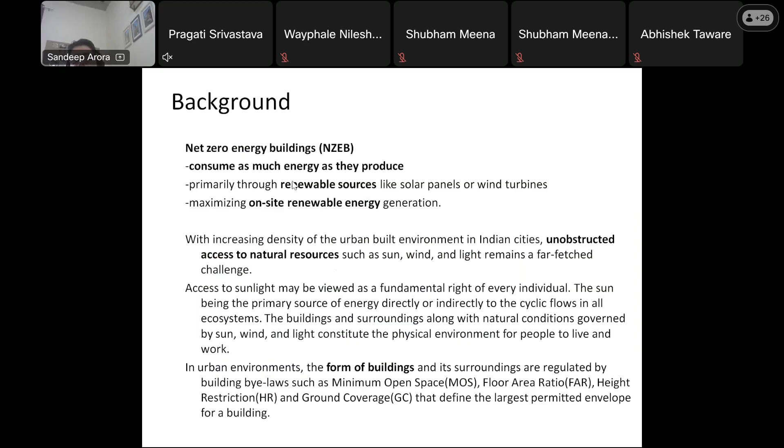One of the news you guys might have heard about, but it's not necessarily news. Everywhere in any city, especially with slum relocation projects, you realize that many of the high density residential areas coming up because of various housing policies and projects have a very different housing scenario, because the primary target is to get to the lower cost, get to the higher density, so that the maximum number of people who are slum dwellers or in a weaker section can be housed.

In an attempt to do that, we end up designing housing or overall building volumes which are too high, too closely packed. In such cases, one cannot expect solar access to light, access to natural wind, morning light and evening light. It's a very difficult scenario. This issue is prevalent irrespective of what city we talk about, and we need to see what we can do about it.

So today I intend to talk about two things. One is climate responsive design, but I don't want to highlight a lot on it because most of the audience are faculty, so they are anyway aware of it. For years we have been studying climate data, analyzing it, deciding on certain strategies. Depending on local conditions, we prioritize certain strategies over another, and come up with strategies of material, finishes, certain kinds of volumes, infiltration or fenestration through the building, and a number of other strategies. But we are very much familiar with that.

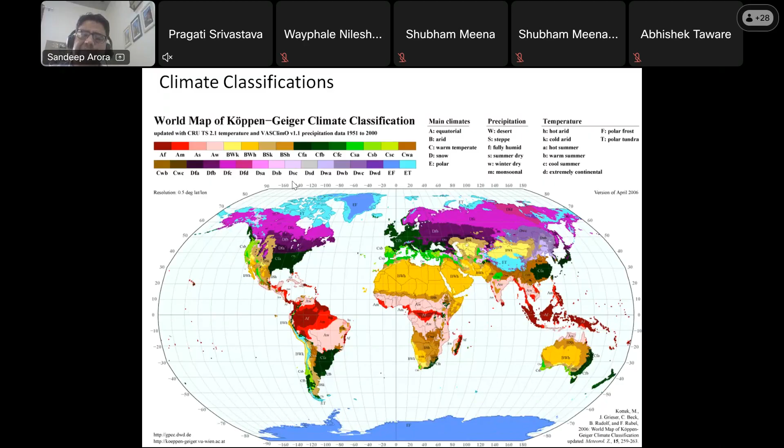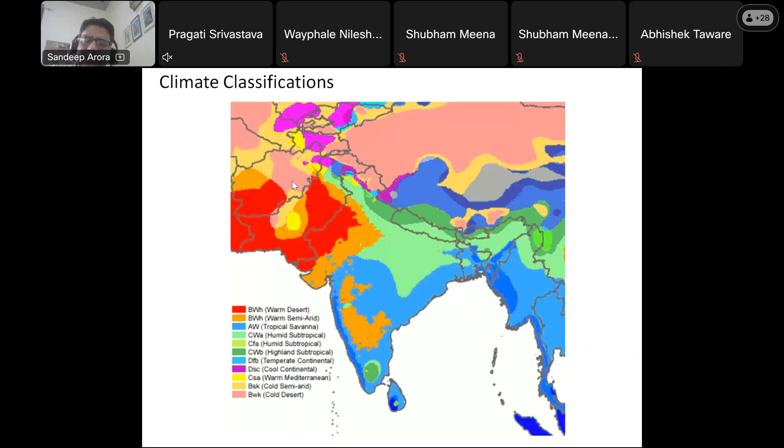But these days, with software and other tools, we don't worry that much about it. This becomes a dialogue only that, okay, this is the climate type, but all kinds of data are available to us. There are so many file types. ISHRAE provides us data of various cities in India, so we can import data from that, insert it into any software, and the software will take care of it.

It will do the calculations for 365 times 24, the annual hours, total number of hours, and identify what kind of characteristics we have for that particular hour - in terms of temperature and humidity. Based on that, it can give us a good plot of what kind of weather we have. This is a very simple tool, and I assume we are all aware of it already.

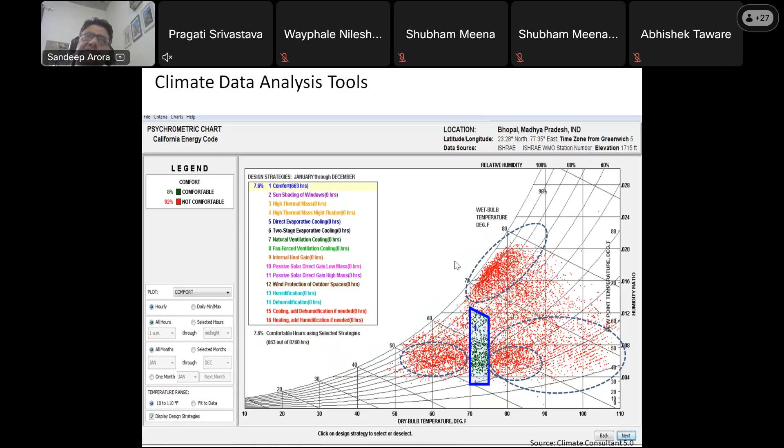This is another version, just showing you certain clips from different tools which are available. We don't need to worry about the tools. So many open source tools are available, but it is more important how we decide on certain strategies. So I'm still covering the basic building design part. The net zero energy part I will move on to later.

Now in this one, this is a version of the same psychrometric chart that talks about beyond the comfort zone. If the data is there, then what kind of strategy we need. So if this is the area where the data falls, we need to do natural ventilation. This is overheated area, so if this is where the data falls, we need to do cooling. If it is beyond it, we need to do cooling with further intense strategies. And after a point, it will go further beyond, and probably air conditioning is the only option that we have.

Similarly, as we go up, if it is too humid, dehumidification is very difficult as a strategy for passive solar architecture. Humidification is easy because we can add certain water features, certain ways of adding humidity. Any kind of evaporative cooling is easily doable, but dehumidification remains a challenge. So pretty much we assume this is where we need to apply air conditioners and all that.

If we go to the left of the comfort zone, we realize this is too cold and we need to do certain strategies like internal heat gains. That is what we find in hilly areas. People keep windows less, and they have the animals inside the dwelling, maybe on the lower floor, so that the internal heat from the animals or from other storage, from the heating or some fire, can contribute to the living area also. Similarly, other ways of trapping the heat using greenhouse effect, using glass houses or sun spaces, different means by which we can add heat. Active heating, heating through mechanical devices and all that will become part of it.

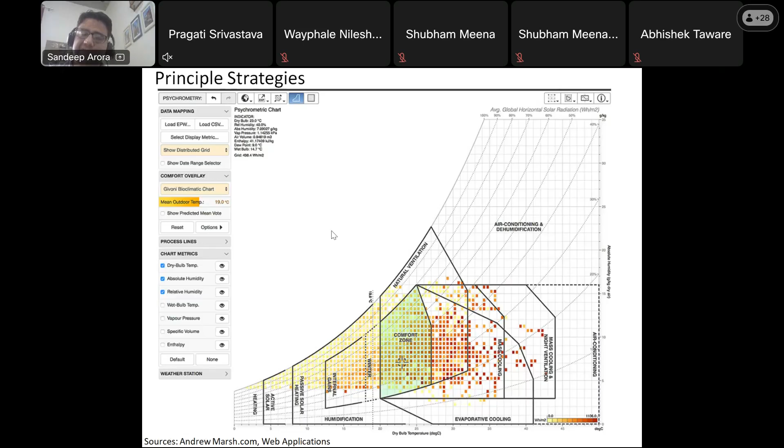So this process has been very common to us. We have been referring to it, and for decades we have been following this when we want to design buildings. So this is not something new. I'm also assuming that all of us are familiar with this process, and things are known to you already. So I will take it further. I'm trying to just introduce certain tools so that I can frame a background for the next work also.

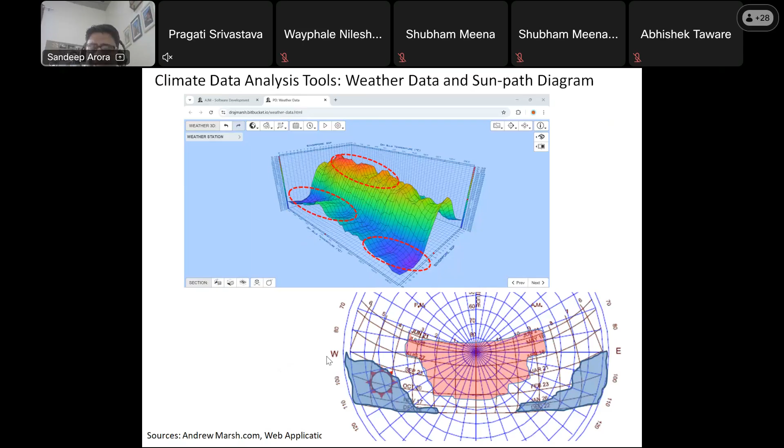Certain tools you guys might have seen, Andrew Marsh, Climate Consultant, Ecotect, all kinds of tools are there. Now I wanted to share this because it's the approach we commonly use. In this case, we see that for this building, sun is here throughout the year, this is where the sun is, and then shadow patterns can be studied.

Now, these kinds of studies always highlight the building that we are trying to design. That has been the approach for the most part. Even in tools, even in our classes, even when we are teaching, we pay more attention to the building we are designing, and we rarely worry about the other gray parts, the other buildings surrounding it. We are not paying attention to that for the most part.

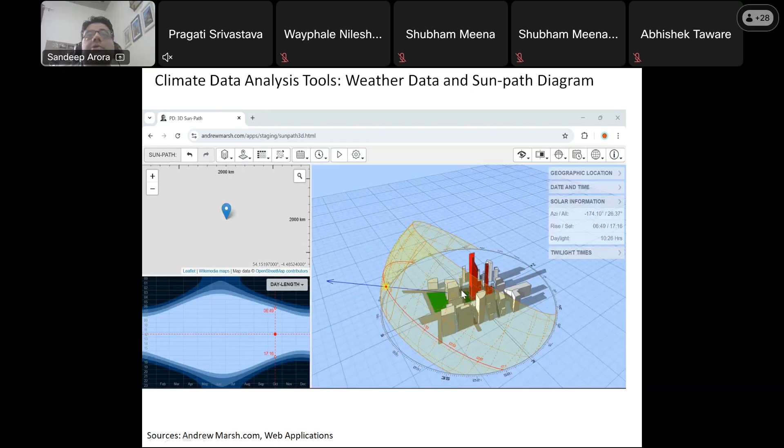But when we talk about net zero energy buildings, and when we talk about harvesting the available resource or on-site renewable energy generation, we need to first assure whether that renewable energy we are talking about is available or not. So that is the idea.

So we go on to the next part I want to highlight, which is about net zero energy buildings. This is an approach I keep suggesting in view of the highly dense new patterns of development. I tend to highlight this more, and I'll be talking about solar envelopes today, so we can relate how one should design and identify the limits, the volumetric limits of design, so that access is not restricted.

So overall, let's look at it again. We want to highlight net zero energy buildings, so on-site renewable energy becomes very important. As far as design is concerned, other than the technologies, as far as architectural design is concerned, our tools are basically the volume, the material, the form of the building.

And then there are certain laws we are following, so of course building bylaws are there. We want to ensure that if we want to use on-site renewable energy, one building is not obstructing the other. This little rendering I have done right here is basically a SketchUp rendering of volumes permitted by the bylaws.

I have used Bhopal, Madhya Pradesh Bhumi Vikas Adhiniyam just to show it. I'm not saying this allows all of this development, but the bylaws do allow close packing of these buildings. If we just go by the basic laws, they allow 6 meter to 6 meter, 7.5 meter spacing. And then if we look at the total FAR, we might have to remove some of these blocks, that is true, but the in-between spacing bylaws very much allow it.

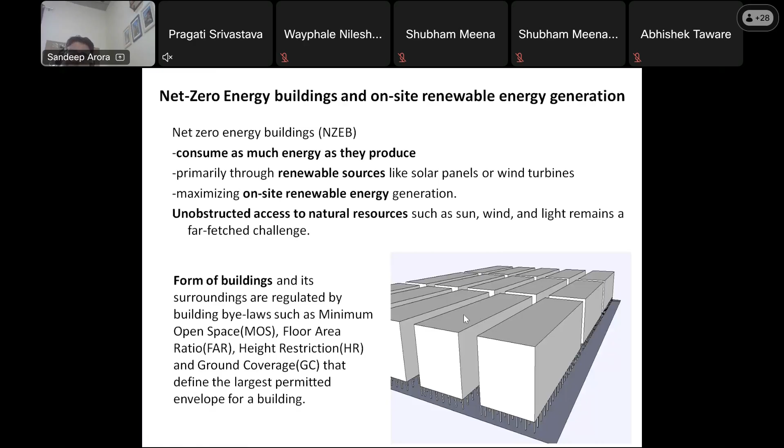Now, if we look at the concept I want to highlight today, it is the concept of solar envelope. Ralph Knowles, a researcher in the USA, for years has been talking about how we design volumes, or what is the maximum envelope. Along with that, what is the shape of the envelope? If you design within that, the building is not going to obstruct the solar access of the other building.

Now, if we compare these two forms right here, every block is going to block the solar access of the other building. But if we compare these slanted, inclined, sliced volumes, these angles are to be identified - I will talk about the process of identifying these volumes. But if we use this process, then each of these buildings is not going to obstruct the solar access, the sunlight access, of the other building.

Now, I don't intend to say it will not block access at all. It will block access, but probably not during the time frame when we want to have solar access. So of course, early morning, evening hours, when the sun is bent down, when sun is very low, then one building is going to cast shadow on the other building.

It is very difficult to avoid that, but we need to understand whether it is required. Should we say that a building should not cast shadow on another building at all? Or do we say maybe not in the morning, not in the evening, but when the sun is at its peak, from morning to afternoon, before evening, if that sun is available and one building is not obstructing the solar access of the other, then that sun can be used for solar panels, building photovoltaic, building integrated photovoltaic, or similar dialogue can happen about wind also. Right now we are talking about solar access, but certain kinds of volume will ensure that these volumes are not obstructing the solar access of the other building. That is the basic idea.

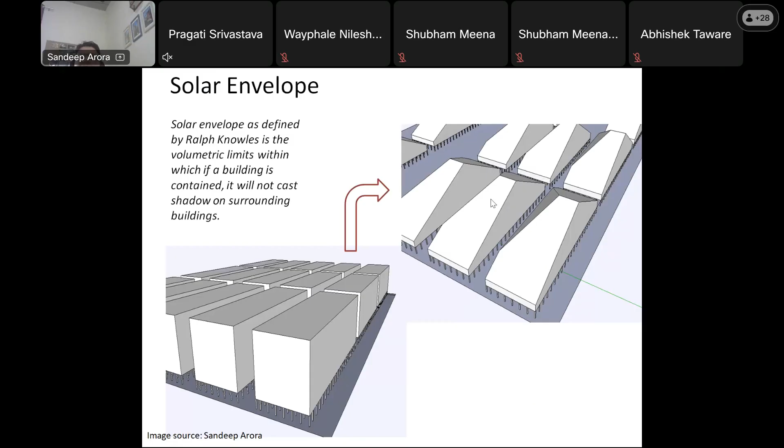Now, this is not taken care of, this is not discussed in our building bylaws at all. I talked about times when it is acceptable for one building to shade another. In the morning hours and evening hours, the sun is very low, so it is going to cast a shade on the other building. It is difficult to avoid.

With that idea, I have developed further renderings and calculations. Now, 75% is not a rule. One can do this exercise for 80% also, or for 70% also. It eventually comes down to what angles are acceptable to us, because it is basically a trade-off.

You are going to lose volume of the building, and if you totally want to avoid any obstruction at all, that will be very difficult to design. But the idea is, between 9 a.m. to 3 p.m. throughout the year, 75% of the radiation is available if we design as per the solar envelope.

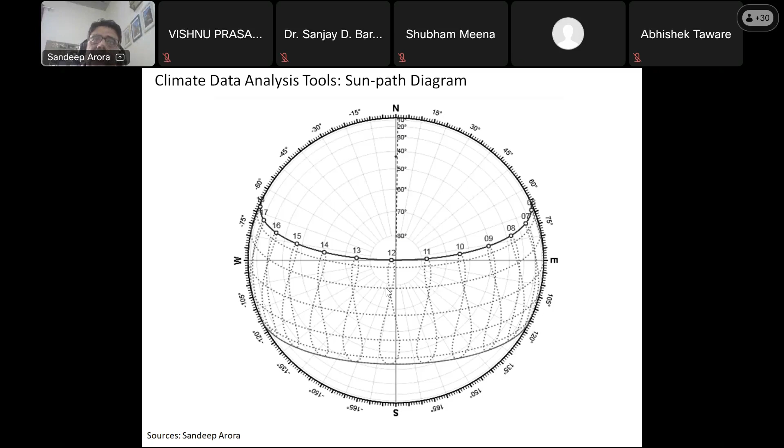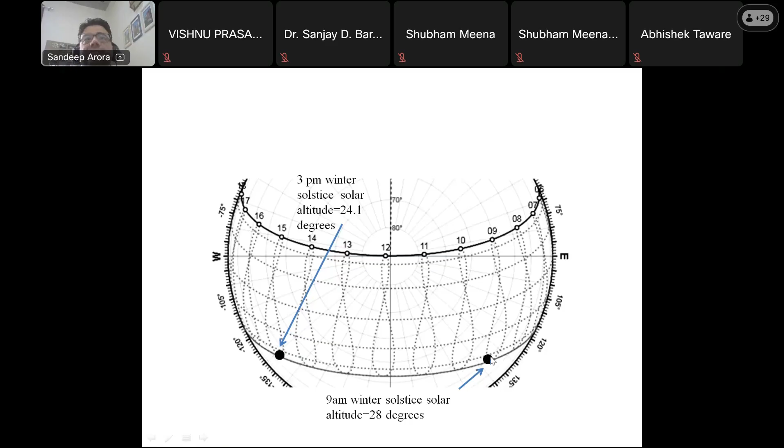Now, briefly covering the process of it. In winters, we know these are the lines. If you are looking at 9 a.m. in the winter solstice, 9 a.m. is right here - this is morning and this is evening. So this is the zone in winter sun where the sun is available between 9 a.m. to 3 p.m. We are doing this study for 9 a.m. to 3 p.m. only. And then we are looking at the summer sun, which is at 82 degrees, which is at the highest.

Now, this data is for Bhopal, as I have mentioned already. Depending on the location, these solar charts will change, but it is very easy - all the tools will allow you to get these solar charts. You just need to enter the latitude and longitude, and they will give you that. So we are trying to identify where the sun is between 9 a.m. to 3 p.m. throughout the year. That is basically the crux of it. So if you're finding it difficult to follow what is going on, we are just trying to find out where the sun is when we want to have this solar access, between 9 a.m.

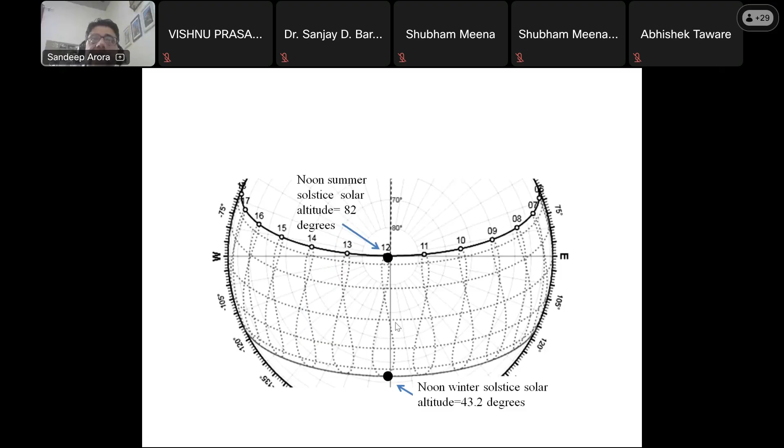Between 9 a.m. to 3 p.m., we don't want to block any of the sun. So if we try to plot the location of the sun, this is the zone of the sun, right here during this period. So this whole sun zone, we want to ensure that in our designs, in our building volumes, this sun is not blocked, because if it is available, only then can we use it for solar panels, ensuring solar heating or some other resource.

Now, I'm not digging into other things regarding overheating and having the double roof or protection from the sun, because there is a balance between these two dialogues, but that part is something very well understood in India. We have been doing that for decades now, regarding where is the sun, shading devices, second roof, evaporative cooling, and a number of strategies. But this is something where not much attention has been paid so far.

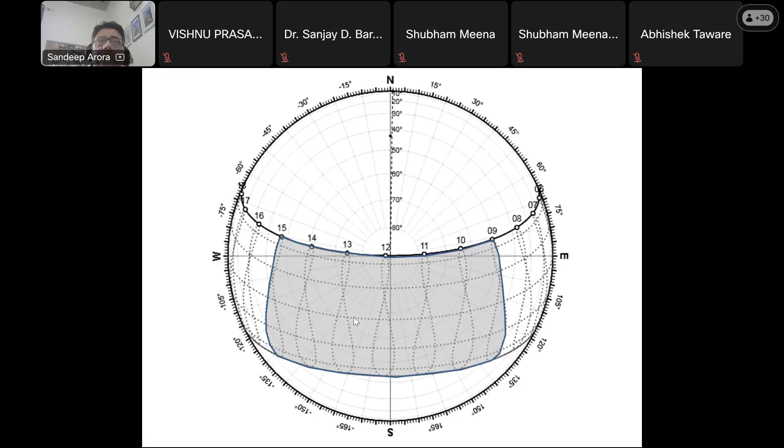And in the evening, the reverse happens. The building on the other side is blocking the evening sun for the building on the former side. So ultimately, from morning to evening, this phenomenon is going to happen.

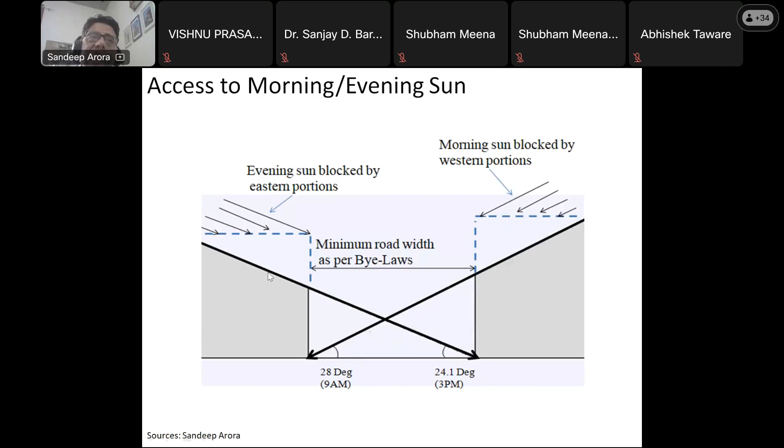So we need to know, if we want to slice away a portion of the rectangular building, at what angle do we do that? These are the angles which I was showing you on the sun path diagrams. So we take that angle from the sun path diagram and slice the building at that particular angle. That tells us how much portion can be sliced off. And if we slice it off, it is not going to block the solar access for the previous building. Same thing applies to the other building also. So we continue this dialogue further.

Now, for the winter sun, we talked about morning sun and evening sun, but what about winter sun? In winters, the sun bends towards south, as we all know. If the sun is bending towards south, every other building, if closely packed, is going to hide or obstruct the solar access for the next building. So in our residential areas, we always see that in winters, some balconies and windows never see the sun, while in summer they do, because the sun is high up, so some sun gets there. But especially those balconies and windows facing south, if there is a building on the south side, the building in front totally blocks their solar access.

Now, of course, sun is required for heating, we can't say sun is not required. Sun is basically the element that defines the rhythm of our life. We wake up in the morning, plants, trees, other animals, the whole life flows with the rhythm of the sun itself. There are two kinds of rhythms if we talk about it: one is seasonal and one is daily. Both of these things, keeping in mind the daily sun as well as the seasonal sun, we ensure we are not blocking the desired sun. That is the idea.

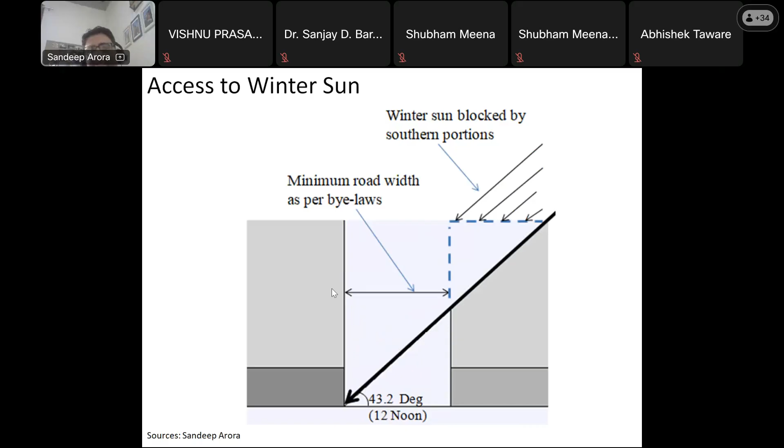So this is the process we are talking about. From that rectangular block, we slice off the portions we just saw, taking these portions away, resulting in the remaining rectangular block, which we are defining and taking further into a buildable volume.

Now we are calling it solar envelope. In a way, this is an envelope. If we build within this limit, it is not going to obstruct the solar access of the next one. So it is highly technical as such, it is all calculated, but that calculation is required.

It is not a theoretical thing that I can just tell you the rule and you do it. It has to be done side by side, depending on what kind of bylaws are there, what kind of spacing is there between the buildings. The orientation of the site will make a difference, and the location of the building will also make a difference, because the sun path diagram will be different for different locations.

So things are technical, but we are in this century where so many tools are available. We expect that we are also capable of handling this level of complexity and designing accordingly.

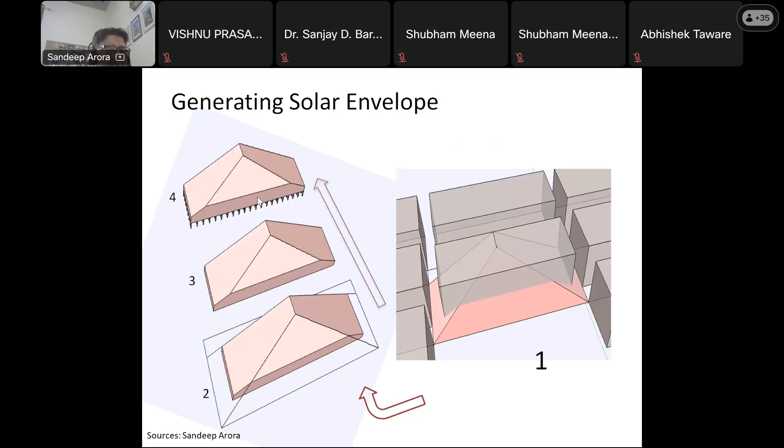So this is a version showing, on the left hand side, what is permitted by building bylaws and what is permitted by solar bylaws. Now it's not a technical term, I'm just referring to it so we can have a dialogue about solar access. These volumes allow the solar access, whereas these volumes restrict the solar access.

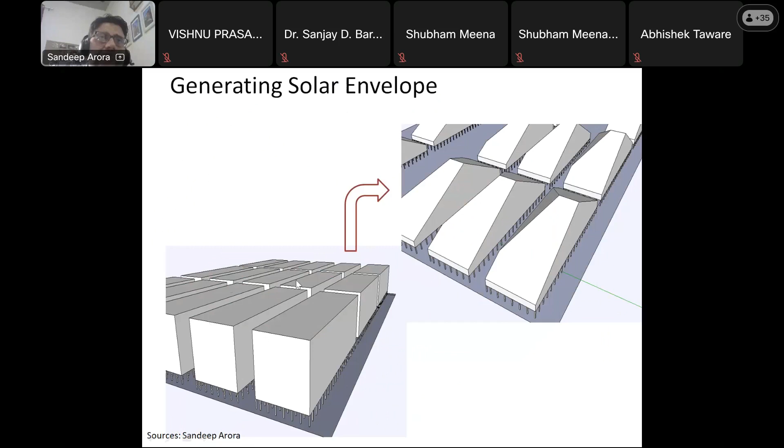So if we want to generate a building form, I have applied this on a residential scenario, because we talked about residential in the beginning. I've applied it just to illustrate the idea further.

Normally we have residential developments, let's say residential flatted developments. One very common typology has stilts on the ground floor, and after the stilts multiple floors, but most of it is rectangular with no difference between the floor plan of the ground floor and the upper floors. They are just repetitive, same floor by floor repetitions.

Whereas solar envelope demands that on every floor the design is different. As we move up floor by floor, the tapering happens, because the volumetric limits allowed by the solar envelope are actually pyramidal in nature, as we saw, because we are slicing at angles. So it results in pyramidal shapes only.

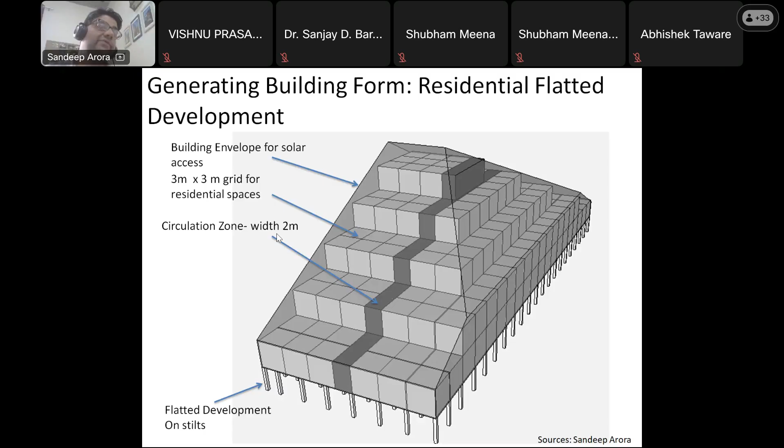The idea is to see what kind of form eventually it will generate if we go with the idea of solar envelope. So it is a task, and designers will have a tough time. Builders are probably not going to like it much because of economic constraints, cost constraints, and repeatability. Modularity is still there to some extent, but repetition is what people love for economy and ease of construction. This kind of scenario wants us to design uniquely for different floors, so that becomes a challenge that adds complexity to our profession.

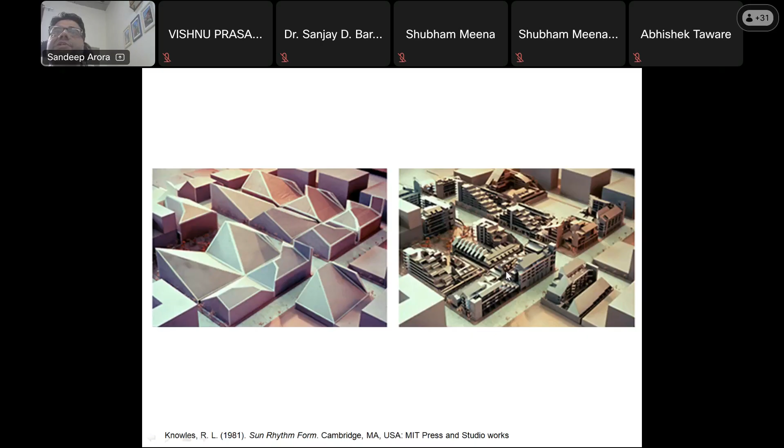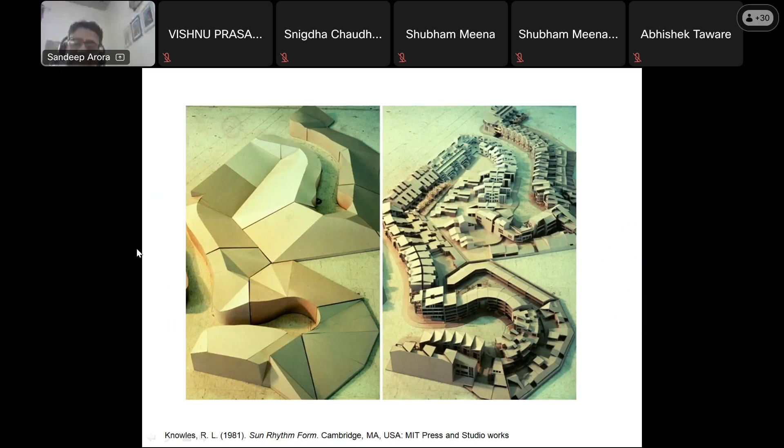The previous one was very much on a gridiron pattern, so it is comparatively easy to do, but that's not always the case. At times the solar envelope and volumes have to be calculated accordingly, giving us pyramidal volumes that are not so simple. This is the overall volume of the solar envelope, and when we detail it out, we realize these are the kind of housing patterns, the limits, again with steps and slopes taken care of, and this is the translated, detailed version of the housing on the right. Again, these are studio projects only that I'm showing you.

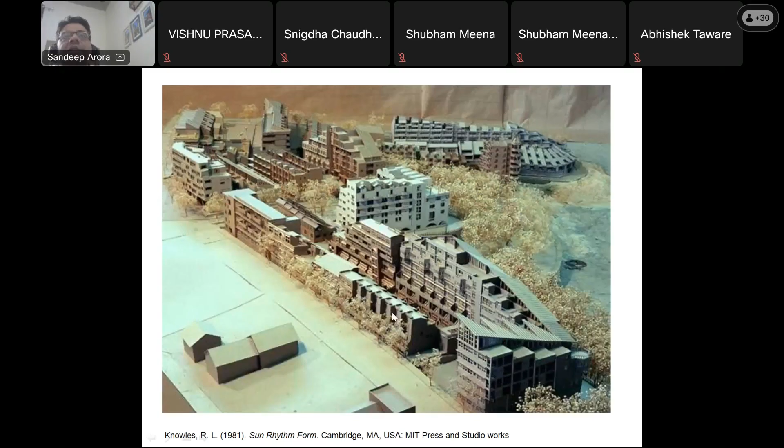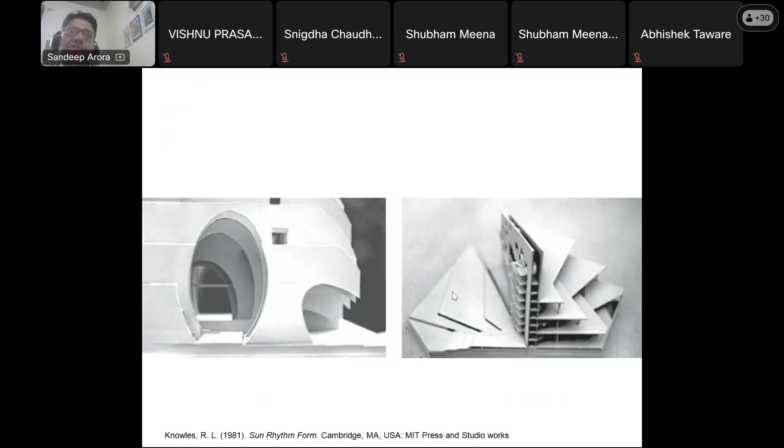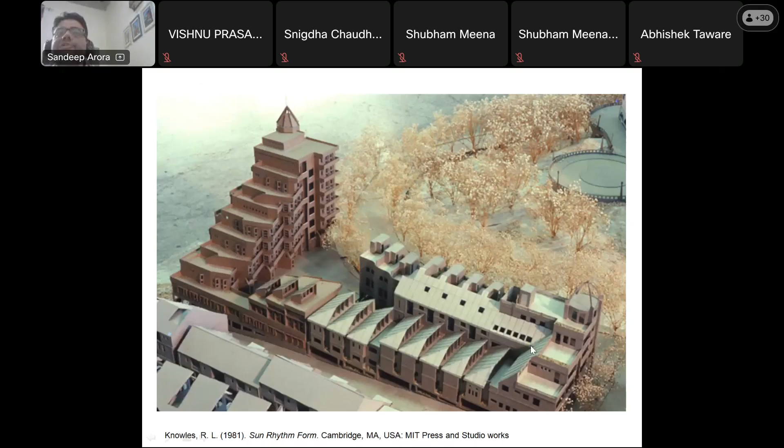Another version, and we can again read the pyramidal translation into stepped translation as we see the detailing of it. It doesn't necessarily have to be residential only; one can start to look at other kinds of constructions too, but it's basically about the limits of the solar envelope. Again, another version where rather than a rectangular one, we have to manage the step nature of it, which is visible here.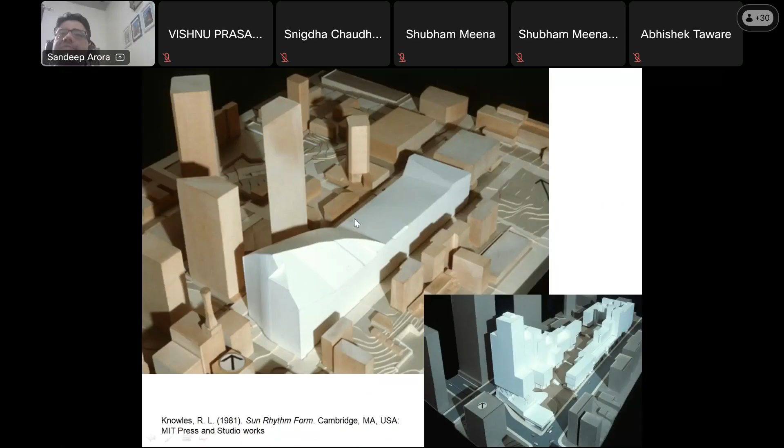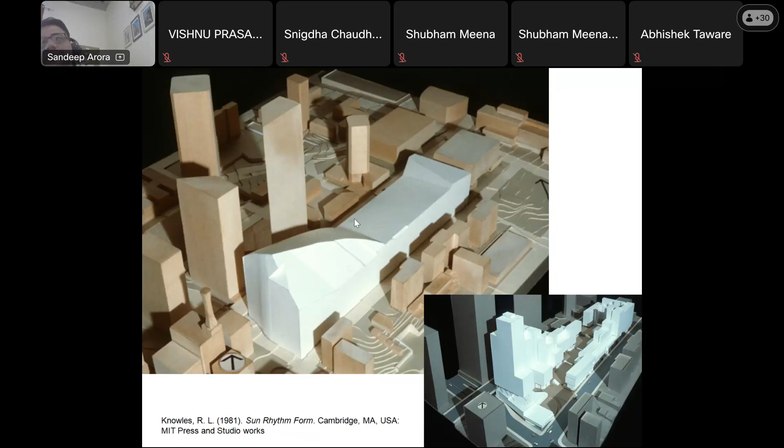Again, one of the commercial projects where the volume in white shows the limit, and then the detailed version of it. This kind of study is rarely missing when we are talking about it. In a way, I think primarily it is more about awareness. At the same time, it is about the complexity of it, and it is challenging how much we are aware, how much we know about how to take care of this problem, and how much we are aware of ways to manage the sun, identifying that difficulty and making decisions accordingly.

Now the study I'm showing you is from classes we conducted at SPA Bhopal, where we used various limitations of solar bylaws, and students studied various projects here and redesigned them, not in detail, but only volumetrically. They commented in an illustrative manner on what way we should design.

Madhya Pradesh building bylaws talk about spacing such as 7.5 meters. They talk about MOS, front, side, rear, all these, and they're probably not much different than other places other than metro cities. To a great extent, for similar scales, they are similar. At the same time, another problem is none of our bylaws take into consideration what to do when your plot is oriented north, south, east, or west.

So orientation is completely missing. It is the same thing whether the plot is oriented east, or has an opening towards west, north, or south.

Bylaws do not talk about orientation at all. They only talk about front, side, and rear. That totally goes against the idea of sun, and when we are talking about climate data and deciding a form accordingly, that clearly shows bylaws do not take care of it. Now, I'm not trying to criticize bylaws here. I'm just trying to say that this is something we probably have to take into consideration on our own.

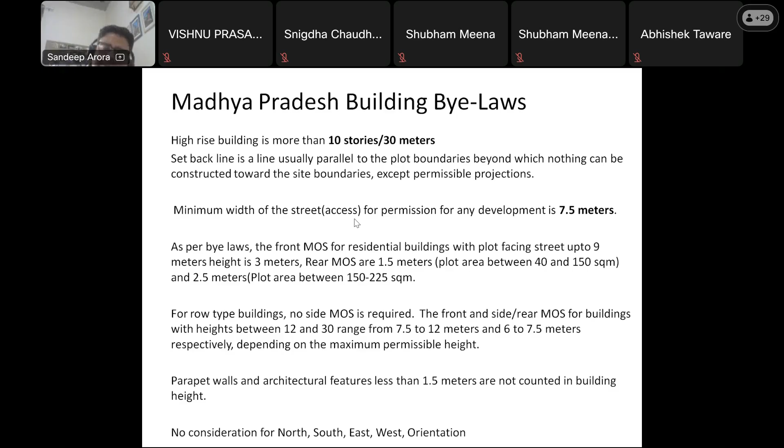Bylaws, it is very difficult and not possible to have a complete compendium that talks about all kinds of orientations. It is rather some kind of tool or software that we need, so that as per your orientation and specific conditions, a certain building volumetric envelope can be identified. So the idea is not to criticize the bylaws, but to highlight that as architects and designers, we need to take care of this issue so that we do not obstruct solar access.

Now, at the same time, there are more issues because we have sliced off a certain portion of the box volume which bylaws permit us. Bylaws give us a certain FAR, and everybody is going to want to use that FAR for economic purposes. As per the studies, the FAR we cannot achieve if we go with a solar envelope - the FAR is much less. So we need at least 1.3 times larger site to achieve the same kind of FAR.

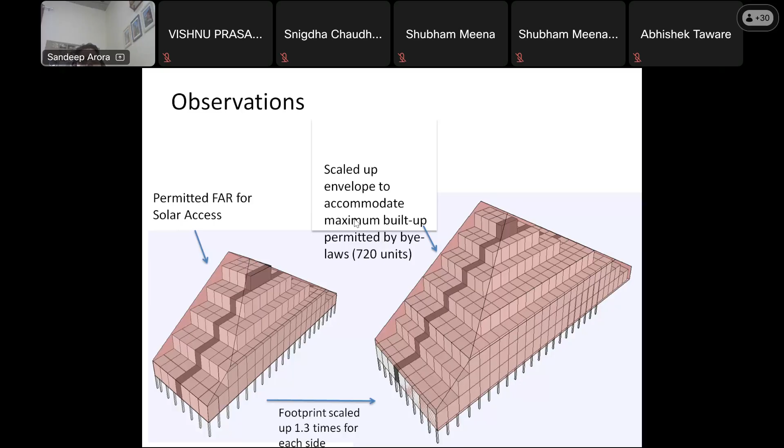So this was a kind of comparison, to count how we are doing on the FAR part, the profit part, or the buildability part - the floor plate as such - when we talk about solar envelopes. Solar envelopes do restrict, and are not probably that economically fruitful or good, in comparison to the building bylaws.

So overall, certain observations I'd like to share: one thing is, if we go with these pyramidal volumes, if we design for solar access, then the floor-wise repetition goes away. We cannot repeat the same kind of floor plans, which in industry is very much preferred for the sake of economy and for easily doing and making it.

At the same time, solar envelopes, because of their pyramidal shape, give us a receding stepped profile that leaves us with a lot of floor area, a lot of terrace area. But we need different ways of looking at this terrace area - rather than seeing it as terrace area only, we see it as a space that has the potential of harvesting sun energy, and there are a number of ways we can look at harvesting that energy.

At the same time, in addition to just saying this, we need certain inclusions. For example, there may be times when this will result in overheating. Things like certain attachments on the roof can be attached, and at the same time they can be removed - certain things can be there in summer, but removed in winter. We have to figure out whether it is a temporary double roof or some other kind of device, but it is not one way or the other.

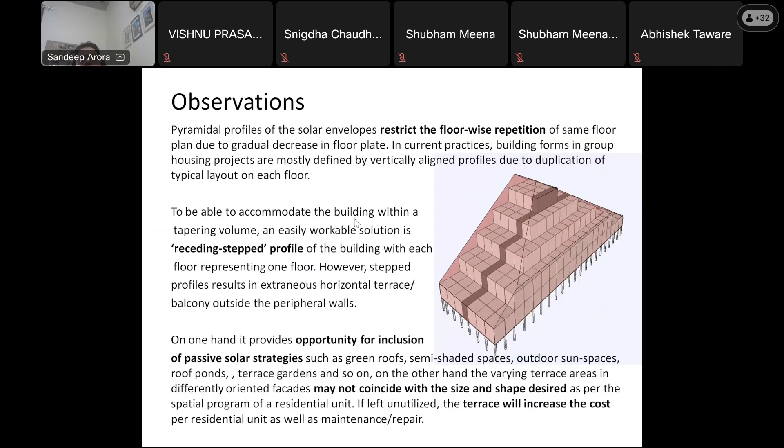Another observation with these things is that financial objectives are going to be compromised. Builders are not going to love this because of the unique floor plans, unique changes, and lesser FAR. These are issues we'll have, but if we look at sustainability, energy gain, and harvesting energy...

Those things have anyway not been the priority of developers for past few decades. But now things are changing. People are moving towards green ways of living. Most residential buildings in any average city now have solar panels installed on the roof, because the cost has changed drastically in the past 10 years. Every institutional building too, I'm sure at your institute and others, we see solar panels installed. So the opportunity for harvesting horizontal surfaces, the roof surfaces, is going to be seen as a fruitful opportunity.

Now, one issue is that with these kinds of designs, unique layouts are going to be a problem - that's more of a task for architects. We are also somehow trained over time by a copy-and-mirror culture. I'm not against it, but with the idea of solar panels, or rather solar envelopes, this doesn't work much. If repetition is there, it has many benefits - that's why modularity is a big dialogue here.

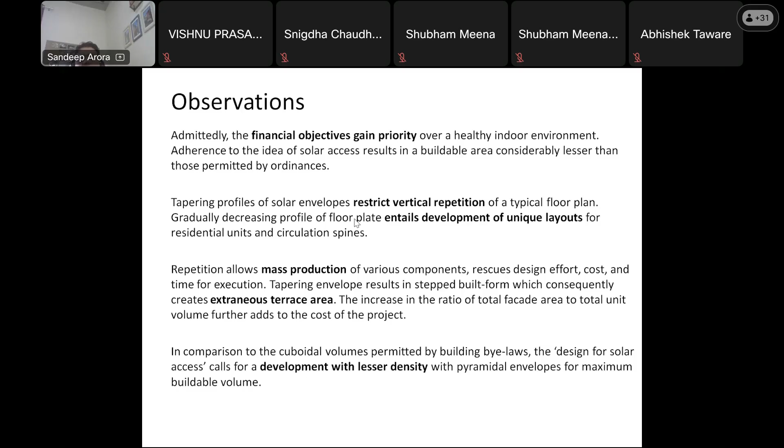But at the same time, when designing so that solar access is not obstructed, we have to go with pyramidal volumes rather than rectangular flat boxes. The development will have lesser density, so it will be difficult to achieve the same residential density, especially for high density projects such as slum relocation projects, the image I showed you a few slides back. In those cases, it will be very challenging to get the same number of units when designing for economically weaker sections in that limited area.

So there are questions, of course, but the answers are probably to be achieved in future. I'm not saying this is an answer, but density is something which is a challenge still to be addressed. Again, when we talk about net zero energy, harvesting the energy of the sun, this is one very important scope.

Now, architects need to have higher order design skills. I have not seen people these days designing and talking about the idea of solar envelopes, slicing buildings keeping that in mind - even at thesis levels we don't see it. But probably eventually we will gain that complexity, and we'll require it in future.

If we talk about the profession, we need to get our drawings cleared by municipal corporations and other formalities, and so many regulations are there regarding whether building bylaws are followed or not. Even urban local bodies, municipal corporations, and architects are not yet trained enough to design solar envelopes. That process can be started, it is there, but capacity building will remain a challenge.

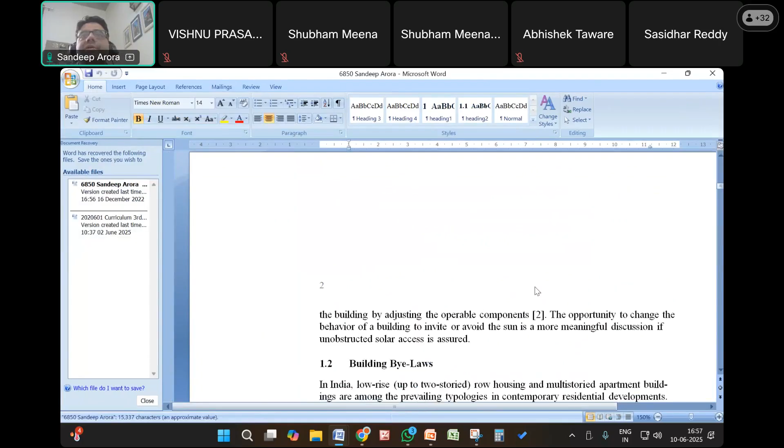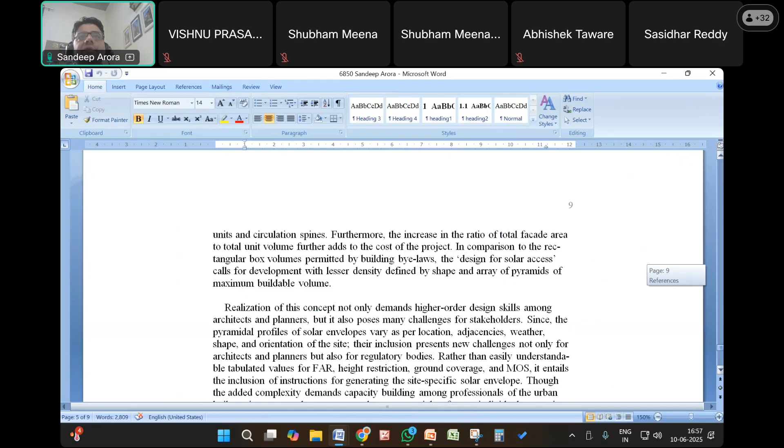My screen is visible, so I will quickly share a file with the proposals that we have sent. This will also allow people to see a little bit more. I did not share it initially because I felt it would involve more science and calculations, but I'll quickly share information directly relevant to the question. Just give me a second, I'm scrolling through that table.

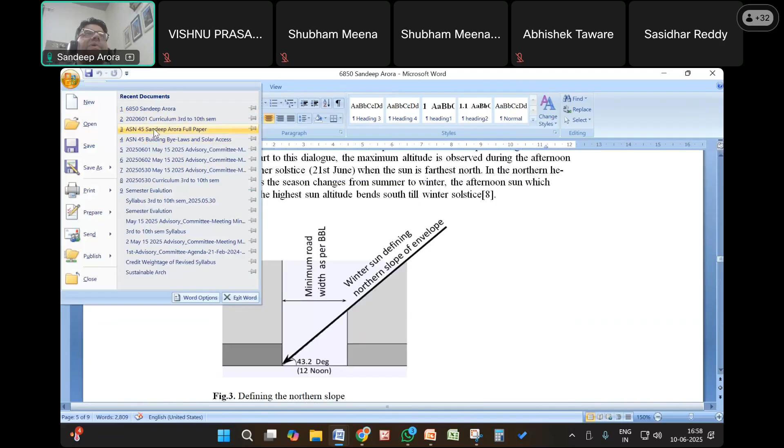We made a certain set of bylaws which we call solar bylaws, and those are the bylaws we shared. The idea is there, of course.

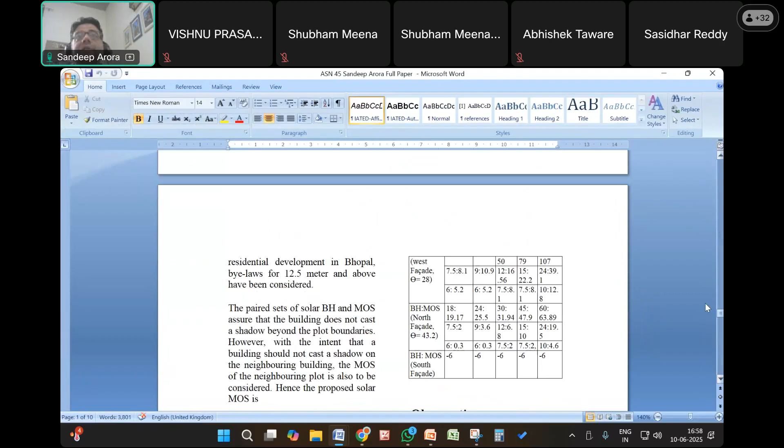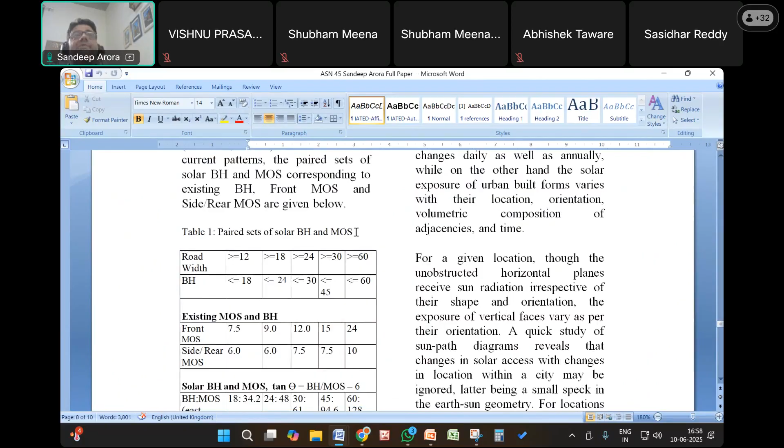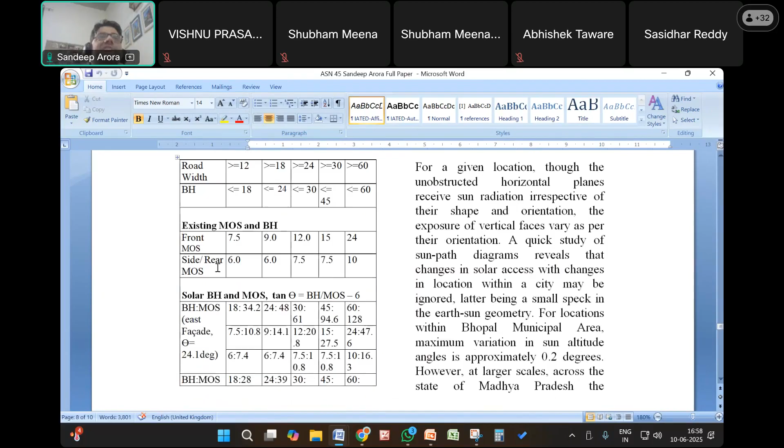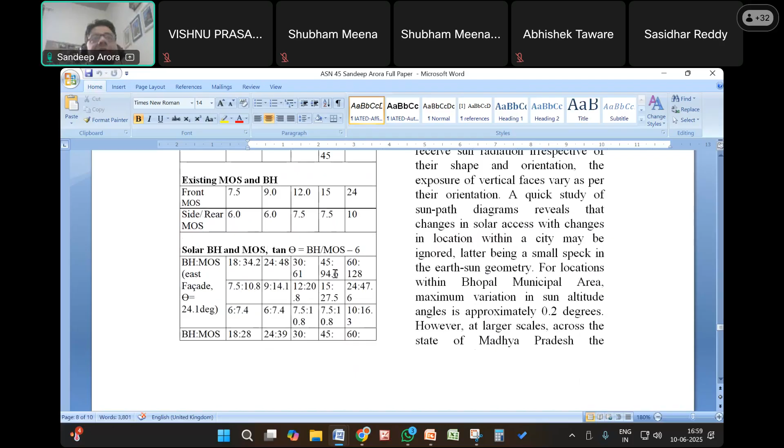One of the issues right here is that we have proposed a paired set of building height and minimum open space bylaws for solar access. So for different road width conditions, it's another version of what Bhumi Vikas Niyam building bylaws give us. As per existing bylaws there are front MOS, rear MOS, side MOS, but rather than that, we looked at what the combination of building height and minimum open space should be as per the solar envelope. These are the figures we've proposed, and they are much less.

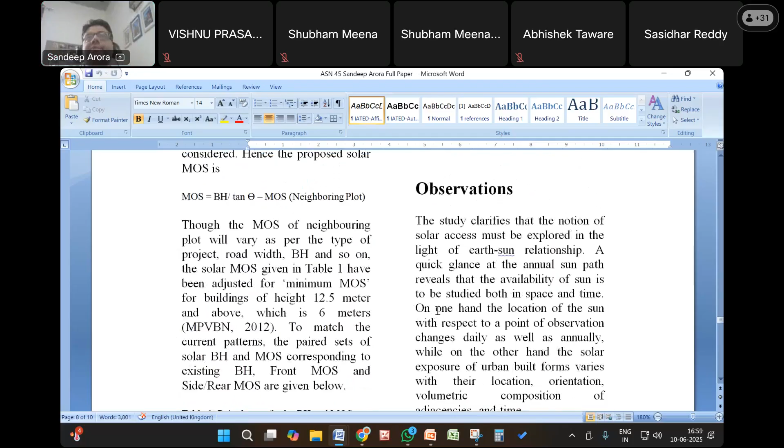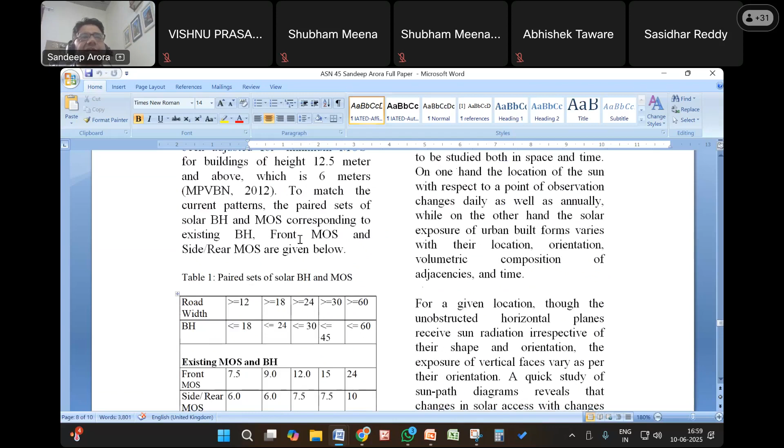So if we go with the idea of the solar envelope, the volumes being built today would not be permitted. These bylaws are trigonometrically calculated depending on the angle, because there are triangles and angles involved, so trigonometry is the only way to go about it. But yes, those have been detailed.

Have you calculated or compared the solar gain between these types of building typologies due to solar radiation?

Basically, this study is more about availability and designing the building form as per availability. Whatever solar gain exists in terms of horizontal area, that same solar gain will happen here. The idea in this work is that one building should not block the solar access of the other. So if we compare this version with the other, these kinds of designs will have the solar access of a plane or horizontal area, meaning between 9 a.m. to 3 p.m. no solar will be blocked. So it's not mathematically calculated, but the idea is that it's pretty much the same, because we are talking about not blocking it. I hope that marginally answers the question.

Fine, but if you're talking mathematically, no, we haven't compared it. Yeah, fine, sir.

Have you thought about it this way: blocking solar direct radiation will affect the heat gain to the neighboring building, right? Yes, yes, so if the neighboring building is getting less heat gain, it will obviously use less energy.